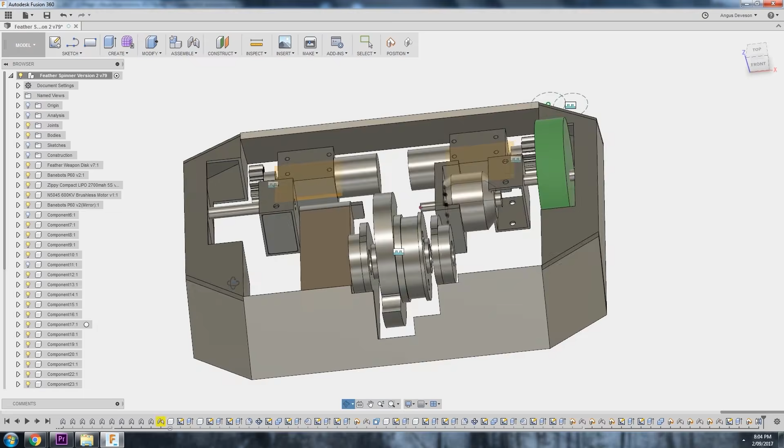I love robot combat. Back when I was 14, I first discovered it through Robot Wars that was finally aired in Australia on Channel 10, where I would watch these machines beat the living daylights out of each other in a specially designed arena, and it really got my attention because not only was it super exciting and cool, but it's something that I felt I could get into because I'm not big on sport, but I like to build and design things. So the idea of designing and building this machine that was put to the ultimate test in the arena in a 1v1 fight really appealed to me, and I'll be honest, I got pretty addicted.

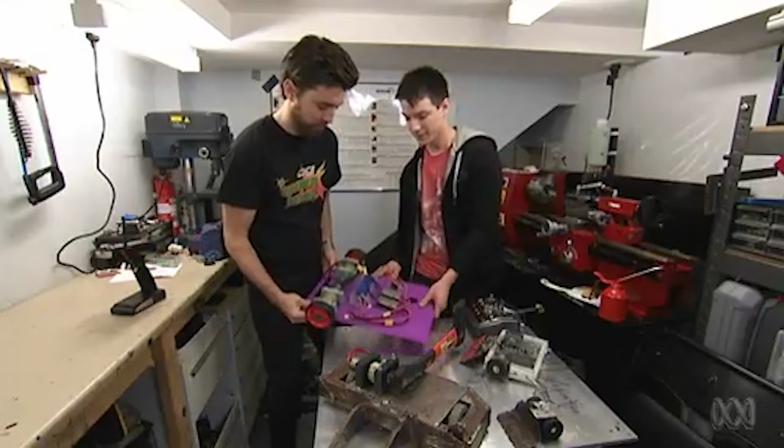For the next 4 or 5 years onward from that point, my whole life revolved around robot combat. I competed in local events, I flew interstate, I would design robots on my exam papers because I couldn't care about the class, but I wanted to build robots.

And the really neat thing about combat robotics is it's a design challenge and you learn all sorts of things. I learned 3D modeling, I learned electronics and wiring, and how to build things that could withstand incredible punishment. And it was those design skills that got me eventually into industrial design at university and proved to be an incredibly valuable foundation for where I am today.

But that was over 10 years ago, and after a while I stopped competing and started instead commentating on events, and it's been a good 5 years since I last competed in a combat robotics tournament, because there's been a few factors involved. But that all changes today. There is a combat robot event happening in Adelaide here in Australia in August, and I am determined to compete. And I'm going to take you along for the journey.

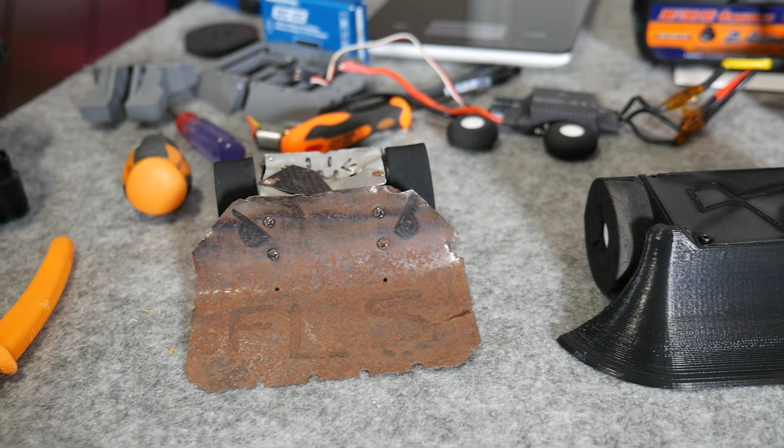There are several weight classes involved, and I'm going to be building a robot for every one, starting with this video, which is going to be walking you through how to build a fully 3D printed antweight to compete in the non-destructive antweight class. Let's get started.

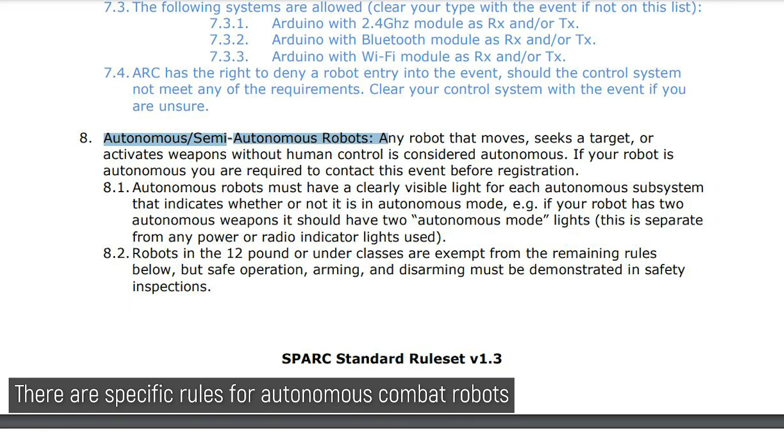Okay, so before I begin, I want to get one thing out of the way. Combat robots aren't really robots, and this upsets a lot of people that we call them robots, but the thing is, they're not autonomous. Now, there's nothing stopping you from making an autonomous killer combat robot, but for the most part, these machines are remote controlled. So think of them like a remote controlled car or remote controlled plane, but with armor and weapons, and they compete in a specially designed arena.

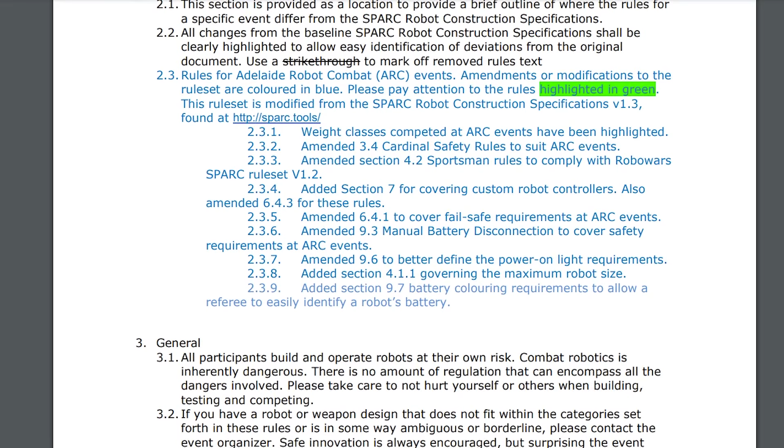But there are rules, so there's weight classes and there's rules for combat. The rounds go for 3 minutes, usually, and the idea is to incapacitate your opponent in those 3 minutes by either destroying them completely or flipping them on their side or otherwise getting them to be unable to move, then they get counted out. Now, you can't have projectiles or explosives or liquid weapons or EMP jamming weapons because A, the safety of the audience is really important, and B, something that just jams a radio so you can't control the robot isn't really that exciting, is it?

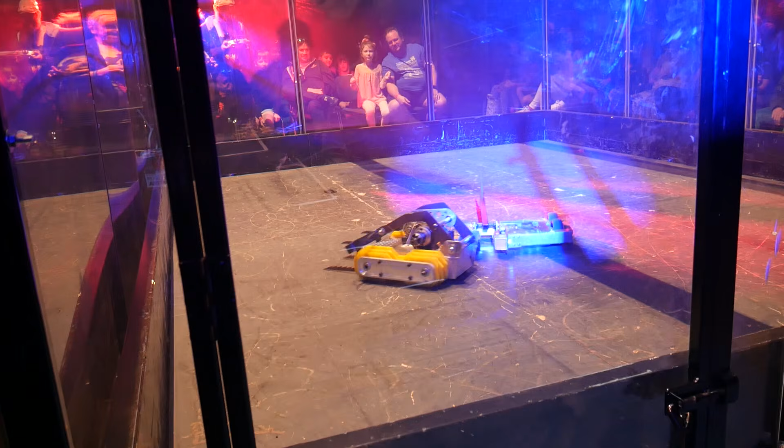So there are rules that basically make it a bit like medieval combat. You can have things that whack, slash, flip, cut, but you can't have anything that could endanger the audience or make it boring for them watching. And just like boxing, there's weight classes. So the ones you see on TV are heavyweights. These machines weigh over 100 kilos and they are massive, they're huge, they're expensive to build, and they are so incredibly dangerous now that they compete in only a few specially designed arenas around the world. And even then, BattleBots, for example, has had to put limits on weapon tip speed recently because of just how destructive these machines are. They are the big boys.

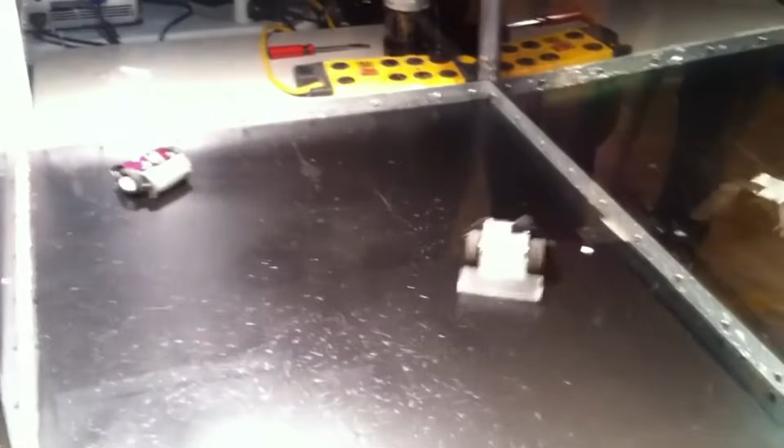These are the little boys. Right at the other end of the spectrum are antweights. These machines weigh 150 grams max. But in that weight limit, you can still have a lot of fun. These machines are easy and cheap to build, they're lightweight, you can transport them easily, and you can build them out of everyday materials.

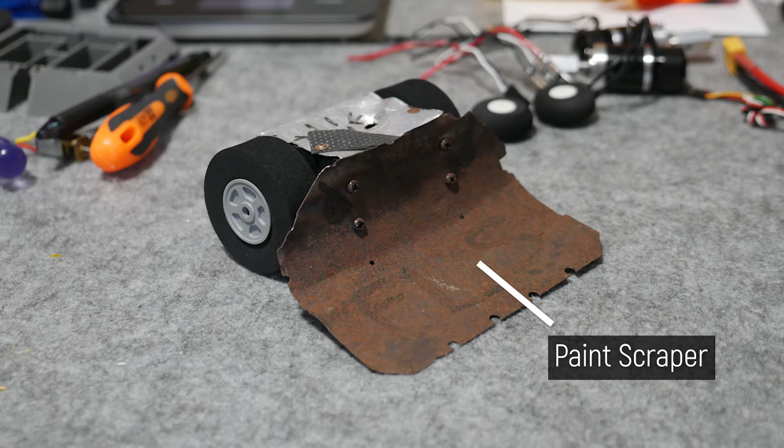Now, this is FLS, this is over 10 years old. I hung on to it because no one was able to destroy it. It's built with a paint scraper wedge with some wheels and some bits of chopping board armor on the side. I built this from scratch in my parents' basement workshop when I still lived there, and it did really well. It actually won its first event. But these days, I do a lot of 3D printing, so I want to rebuild this machine using 3D printing processes, and I'm going to release the files to you guys so you can build your own as well.

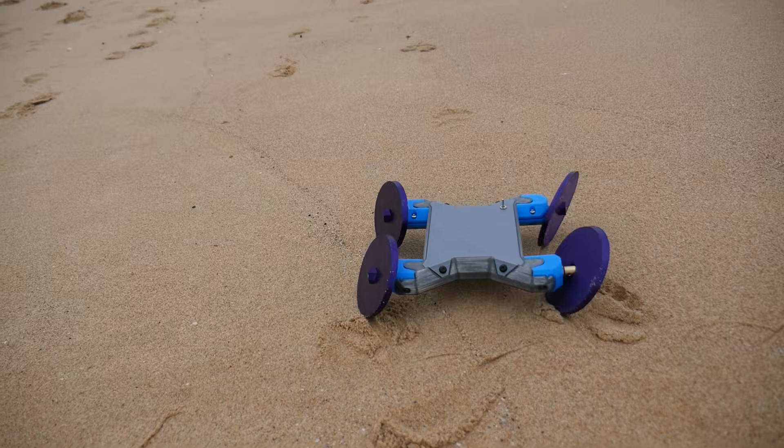But what goes into building a combat robot anyway? Well, some of you may remember last year I made this. This is one of my off-road platforms that I designed to test wacky wheels, like the wobbly wheels on that. And this is essentially the same as a basic combat robot. It uses all the same components, and it's very easy to put together once you know what's involved.

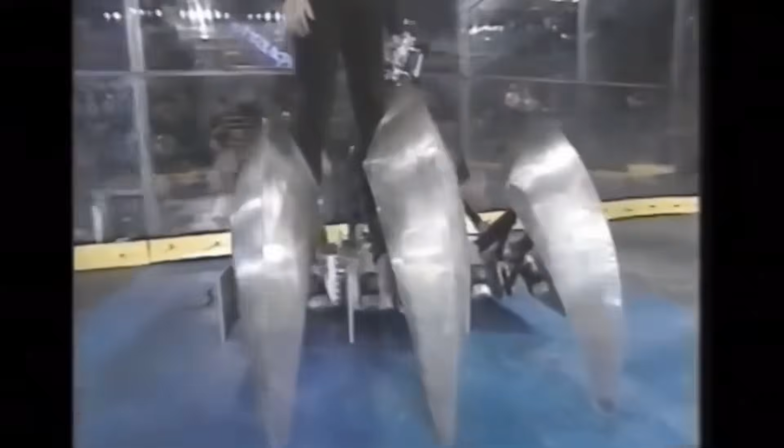It has motors, it has speed controllers, it has the receiver, and it has a battery. And those are the core components needed to get something like this moving under remote control. Let's go through each of those components individually. These are gear motors, and you need them for your machine to move. Without them, it's just going to be sitting there unless you figure out some sort of crazy walking mechanism, but yeah. I would start with motors, and there is a huge range to choose from.

I usually look on eBay to find low-cost gear motors that I can use for my robots, but you can go all the way to custom-designed, specially made combat robot gear motors that are hardened, which means they're much more durable, and everything in between. So for example, here I have these little 1000 RPM gear motors from eBay. They're rated for 12 volts, which is a good voltage to go for combat robotics using a 3-cell lithium battery.

Now the really cool thing about combat robotics is even within the rule set, there's a huge scope to make it your own. As long as you're within the weight limit and you're not violating the rules, you can really do what you like. And choosing your gear motor is a good example of that. You can choose a really small gear motor, which might be lower power, but give you more weight for a bigger weapon or more armor, or you might choose a much larger, more powerful gear motor, but that's heavier and therefore it's going to need a bigger battery, use more current, and take up more of your weight limit. And it's all this sort of balance of finding the best for your design and working with that.

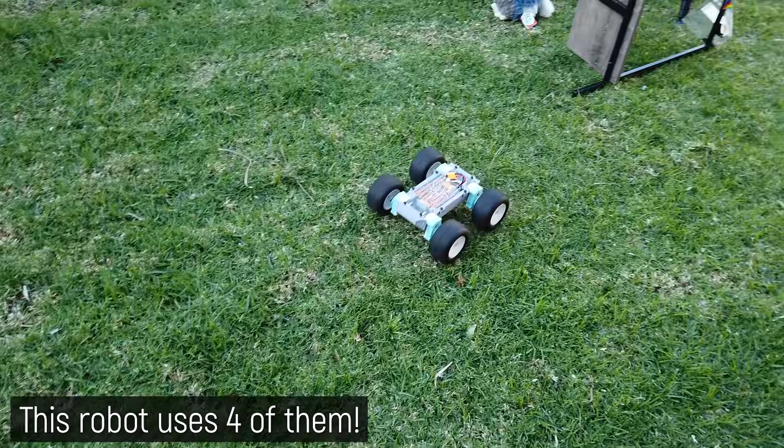Now in terms of the output RPM, I would say you want to go for something between 500 and 1000 RPM in terms of the output speed. And you want something that's not too small. For antweights, you can use these really tiny little gear motors, but I also really like these ones. And if you want to go super hardcore, these ones are great for beetle weights and even a little bit larger. They're very expensive, but these are very, very durable and very high power. So there's all sorts of things in between. I just recommend starting on AliExpress or eBay.

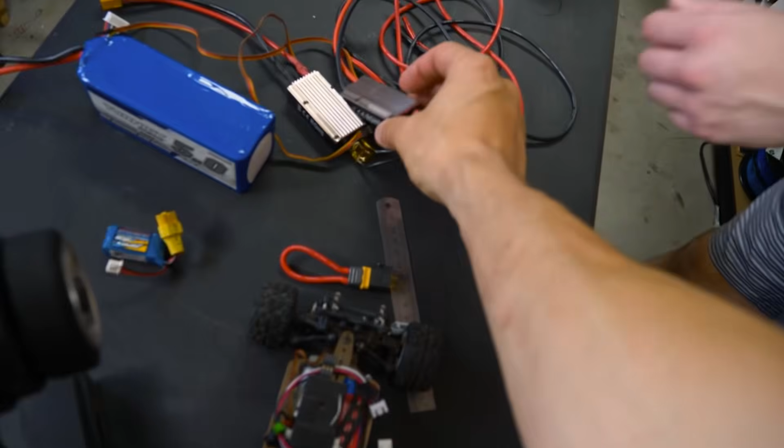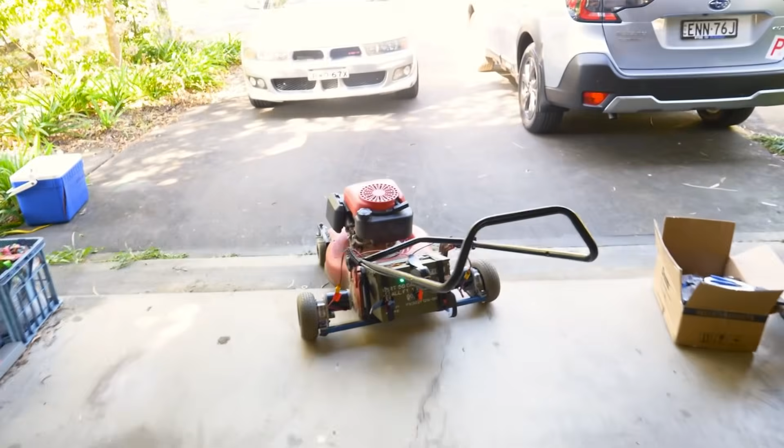This is a 2-in-1 speed controller that I picked up from FlipSky. This is what I'm going to be using for my build, and it controls 2 different motors using 2 inputs from your receiver. Speed controllers come in all shapes and sizes, and you want to choose one that's suitable for your motor. They can be tiny like this, in which case they're suitable for a small little motor, or they can be massive like these guys, which I used on the remote control lawnmower build I did with I Did a Thing. So these guys are really large and they're rated for 85 amps. And I use them to control those wheelchair motors on that build.

Usually when you buy your gear motor, the listing will show on the datasheet the stall current for that motor at the rated voltage, and that's a good way to size your speed controller. If you go too small, you might blow up your speed controller, and if you go too large, well, you're wasting space. I'm not going to be putting this into my antweight, which only can weigh 150 grams, am I? I'm going to be trying to size it for something like this. So for my build, I'm going to be using the FlipSky speed controller because, again, they're cheap and they are a 2-in-1 deal, so I don't need a single controller for each motor, which adds wiring complexity.

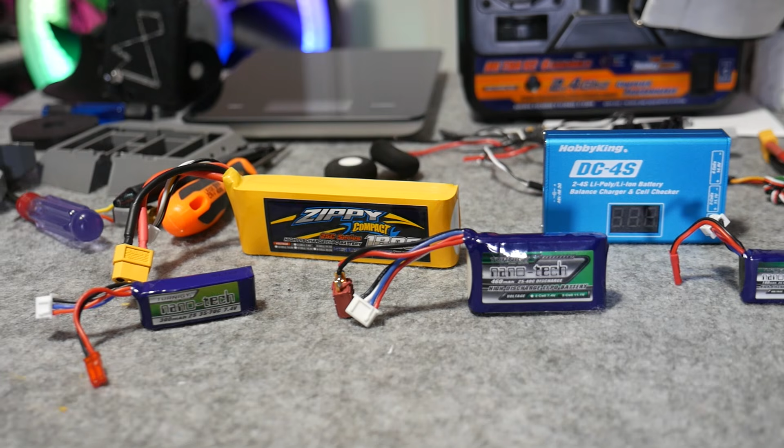I can just use the 2-in-1. Next up, you need a way to power your robot platform, and for that, you need a battery. So these are lithium polymer batteries. They've become incredibly easy and accessible to get now because of the advent of all sorts of remote control aeroplanes and things. That's what these ones are specifically designed for.

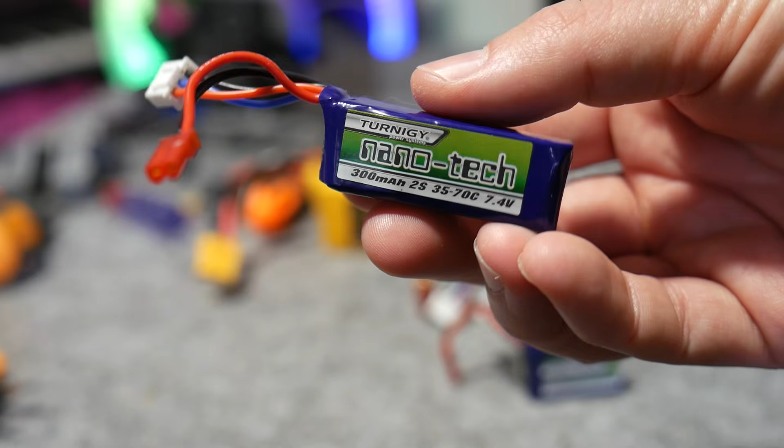And they come in all shapes and sizes, from little tiny ones to much larger ones to massive ones that have a ton of capacity. So when I say capacity, how do you measure how much capacity a battery has? Well, it's measured in amp hours, and these batteries are rated for milliamp hours because they're usually much smaller than 1 amp hour. So this little battery here, 300 milliamp hour, that is more than enough for an antweight robot. Remember, they only have to run for 3 minutes at a time.

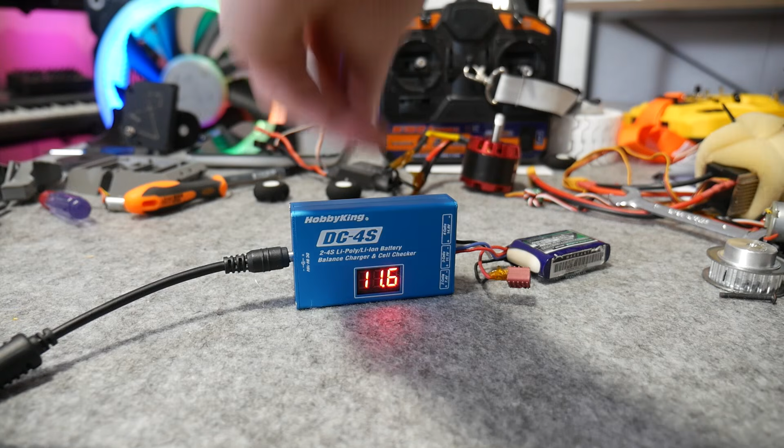And unless you have a very high-powered drive system or weapon, then 300 is more than enough for an antweight. To charge this, I recommend the low-cost chargers that simply plug into this balance lead, and then they charge it over a period of time. Now, I do need to say, with lithium polymer batteries, they can catch fire. There is an inherent safety risk with them because of the lithium inside. When they do catch fire, you can't really put them out.

So to use them safely, you need to make sure they are fully well enclosed and cannot be damaged. So they are actually soft. They're not hard. There's no hard case. So you need to be responsible for making a hard case around them to protect them. When you draw too much current out of these or you discharge them too much, they can become what's known as puffy, where they actually will puff up from gas inside the cells as they deteriorate.

When a battery goes puffy, it's bad. You need to replace it and throw it away. And there are very specific ways to safely dispose of lithium polymer batteries.

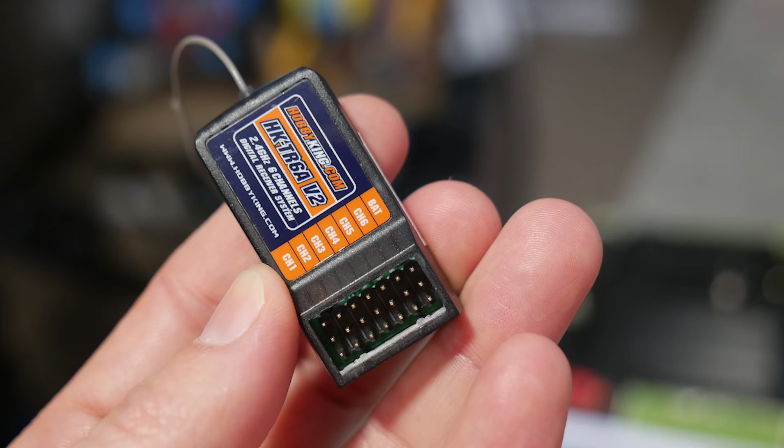So for example, for a remote control aeroplane, you might use this for throttle, ailerons, I'm not exactly too sure on the terminology, but you have 6 different inputs to choose from. But if you have a transmitter suitable for a remote control car, it may only have 2 channels, which again is suitable for a robot like this with only drive, but you have no way to control a weapon.

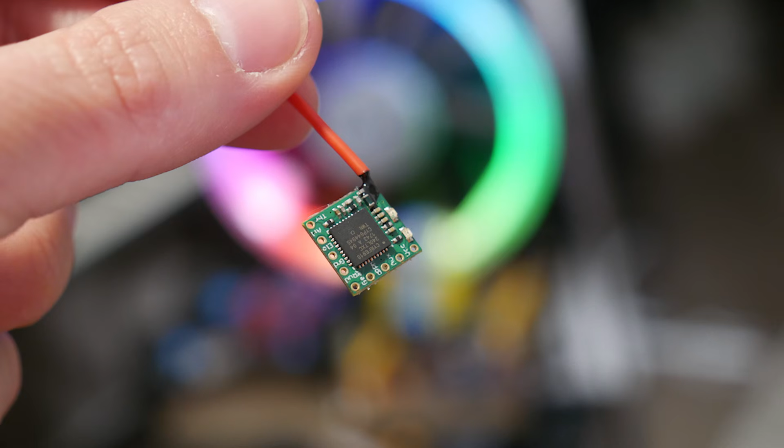And when you're building antweights, size and weight again is very important. So although this is a 6-channel receiver, this is also a 6-channel receiver. And yeah, they both do the same thing, but this is microscopic in comparison. Much harder to wire in, but it does exactly the same job. So when you're choosing what you need, keep in mind the size of the receiver and how many channels you need for your machine.

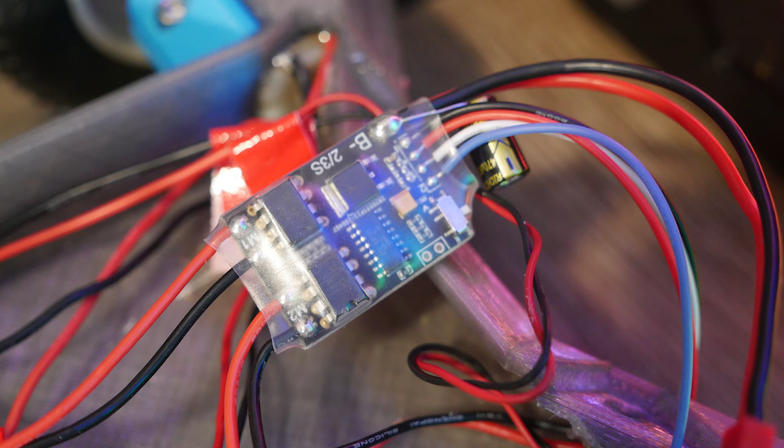And then there's also things to consider like mixing. So for example, these drive like tanks. It's called differential steering, where both wheels go forwards with the 2 motors working together, but to turn, they actually go in opposite directions. So that means to control this properly, you need to mix those inputs, and it's known as V-tail mixing or tank mixing. So many transmitters will actually offer it because it's used in some aeroplanes, but also the 2-in-1 speed controllers like this one from FlipSky actually offer V-mix built into it, so the transmitter doesn't even need to do it because this thing can do it for you.

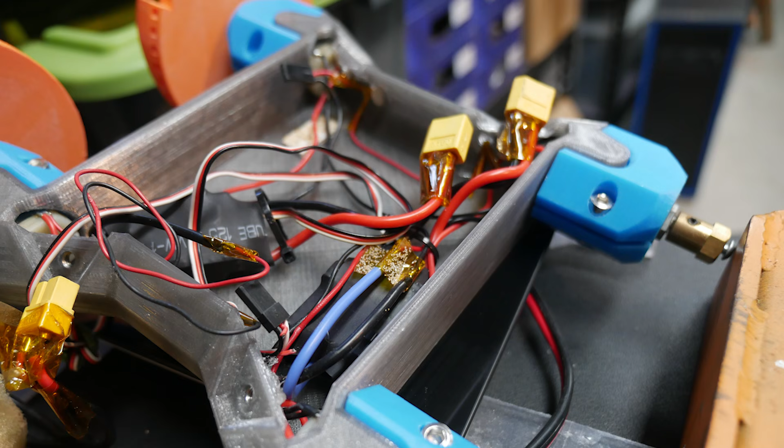And you can also buy separate modules that plug in between your speed controllers and receiver to do that mixing. But keep that in mind, because your robot has tank style steering, you need mixing somewhere in the mix to make it all controllable. And really, that's the core of what you need to build your combat robot.

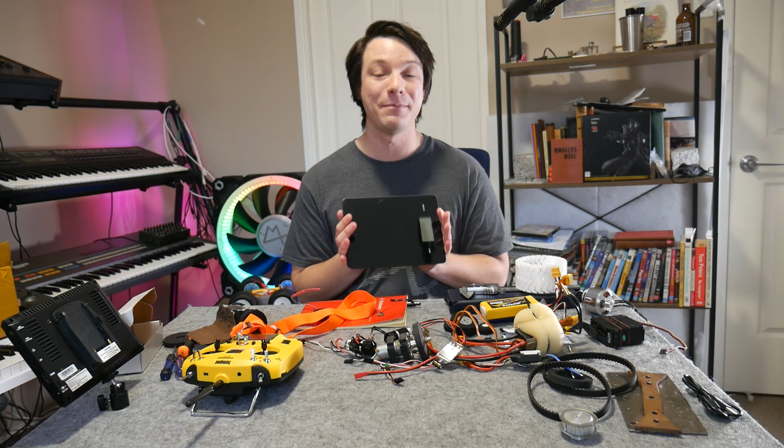Now, there are other things like your plugs. You need a switch of some kind to turn it safely off and on. And also, I recommend a scale. This is just a kitchen scale. This is great for all the insect class robots like the antweights and beetleweights, because again, you need to make weight. It can't be overweight. It's like boxing. You cannot compete unless you're within the weight class. So I use these scales all the time to weigh up components and get an idea of how heavy the robot is before I then take it off to compete.

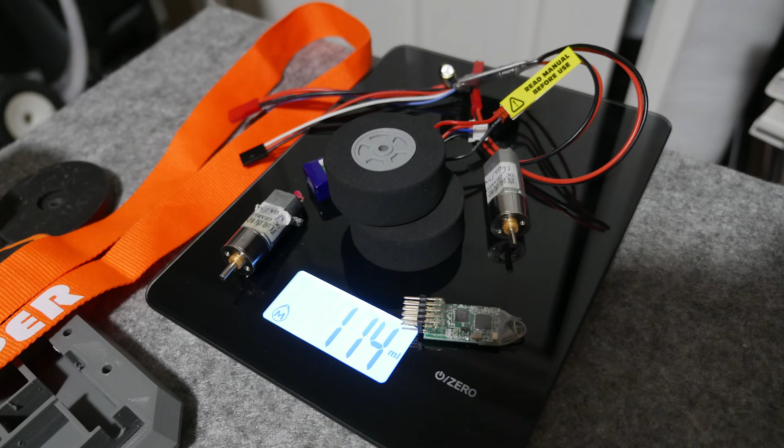So I think it's about time we design up a version 2 of this little wedge robot so I can then start drawing it up in Fusion 360. Before I do anything in CAD, I always start with a sketch. And what I really like to do, and it's really practical, is just to get your components and sketch them out on a piece of grid paper. This really gives you a real world idea of what shape and size your combat robot should be, and just where the parts can be in space.

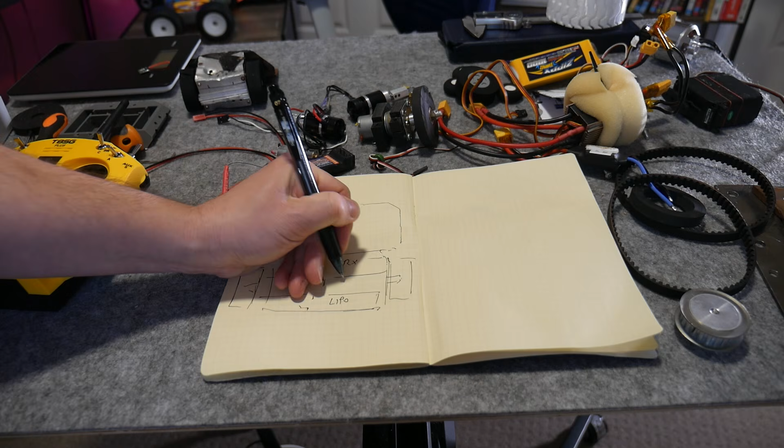And as I said, I used to draw this sort of thing all over on my exams and just when I was bored to get an idea of how to arrange these parts and Tetris them in such a way that I could build the most compact design possible. And this is really the best way before you get into CAD, because if you start with CAD, you'll limit yourself. But if you start with pen and paper, you'll come up with some really cool ideas that you can then translate into 3D design and then create really cool robot concepts out of them.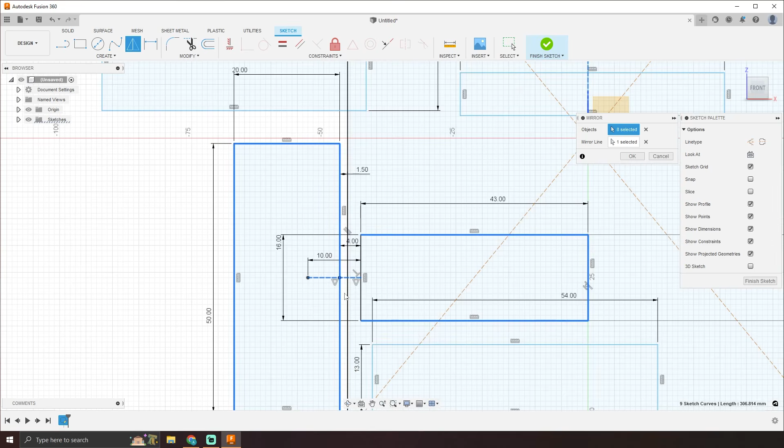And it's only after I've done some designs on pen and paper that I finally come into Fusion 360, and to get an idea of where the components are in space, again, I do a single sketch, where I'll measure my components with calipers, make sure they're precise, and then bring it into a single sketch to get an idea of where they might sit before sketching anything more complex in 3D. Because again, it's really easy to lose yourself in 3D space and then design something that's too small or where the parts won't fit. But by designing in this order, I feel you're much more likely to end up with a design where the parts actually fit together and your final print isn't going to be too small, and then you'll have to go back to the drawing board.

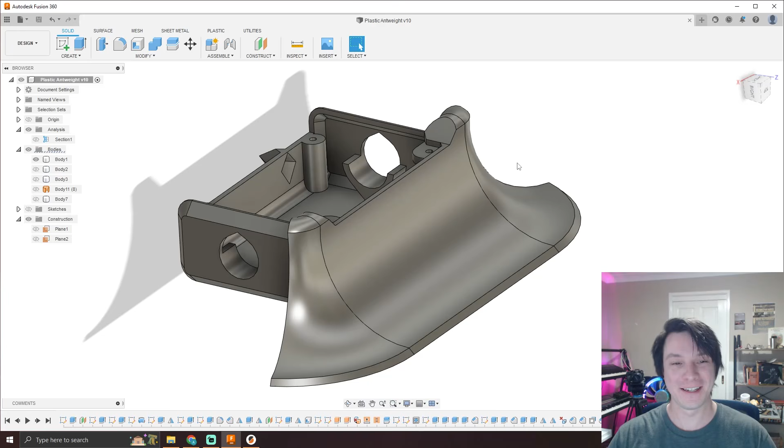Okay, I got a little bit carried away. As usual, it's now nighttime.

So I'll just walk you through a few of the design approaches I use, starting with the shelling approach. So let me just hide the top body here. What I've done is I designed it solid, and then I used the shell command to hollow it out. And what's really neat about that is if I go back to the shell, I can change the amount, and that can be changed to make it lighter and suit a more detailed printing process like SLS or MJF, I think it's called, multi-jet fusion, where you can get away with like a 1.5 millimeter thick wall. But with FDM, I'm probably going to go with 2.

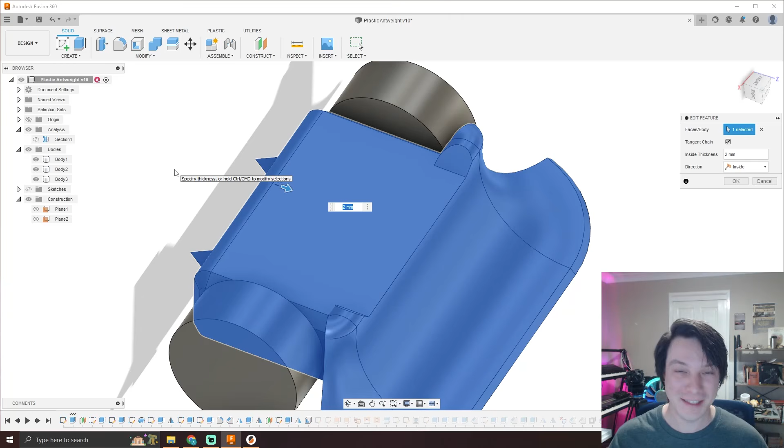But let's say I want it to be even thicker, I could say like 3. And I can update that as follows. And then my whole timeline updates with a thicker wall like that, but I'm happy with 2. I think that'll print fine.

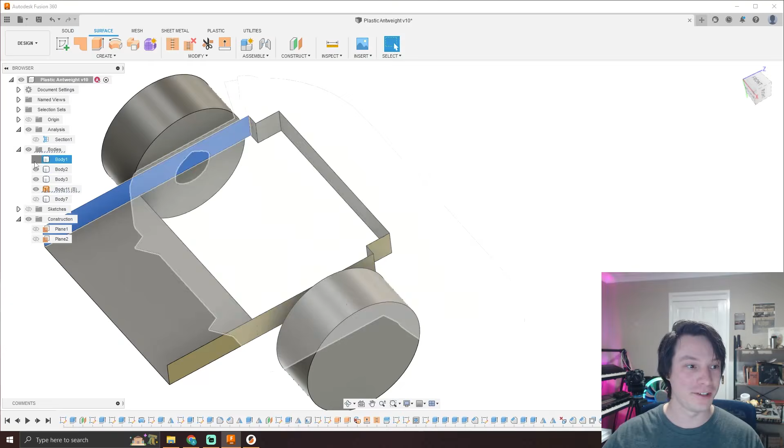And obviously you need to get into the robot, so I've got this top panel here. And to make that top, I use this surface body. So I use the surface workflow to draw this body, which then I use to cut into that shelled shape to remove the top section to make it a separate part that then I could use as the lid. It's got some details for screws to hold it in place, a little hole for the LED, and my logo. It's interesting to see just the tops of those spikes because it happened to intersect with them there. And I can change that if I like, but it's actually looking pretty cool to me.

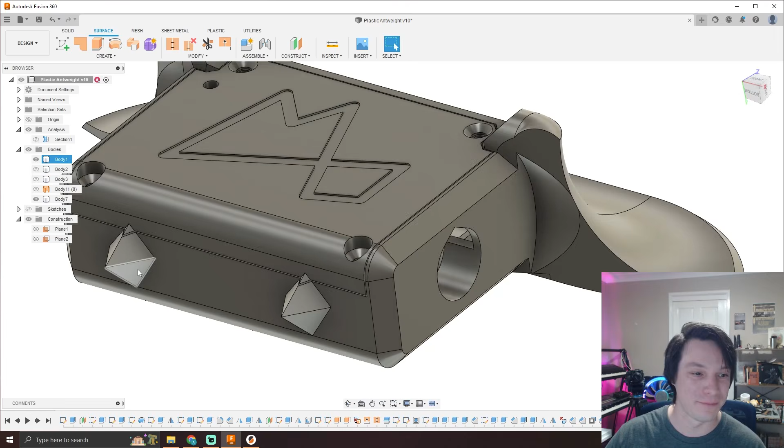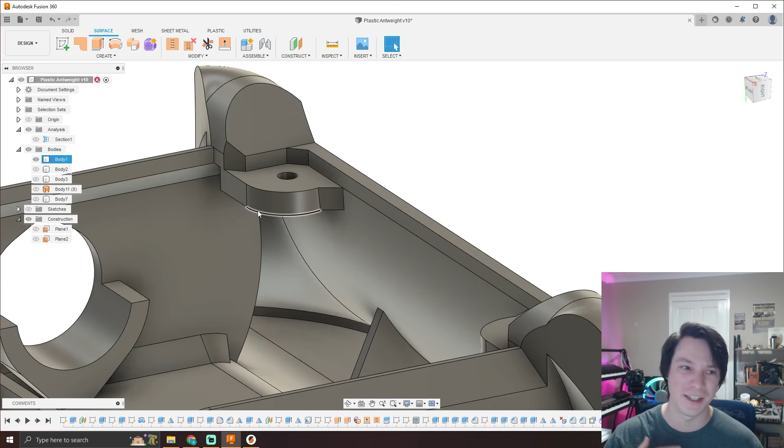The only issue is some areas will need a lot of support material. Namely, if you look on the side, the bottom area will need support. And also this area here, where I am allowing for that top to be screwed into place, needs support. Now I could go through and design some angles and chamfers and all sorts of features to bridge and whatever, but it's fine. I'll just send that with support material because I can easily access it. I can pull off the bottom and pull off those areas, and then I can put it together.

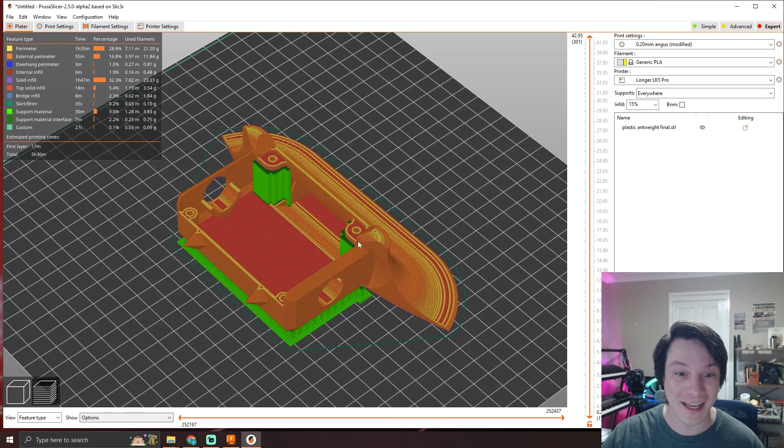So let's export this and then open it up in PrusaSlicer. I almost forgot this, so I just switched to the latest alpha PrusaSlicer 2.5. I can't keep up. But the reason I've done that is because there's this new setting which is called Arachne. I don't know how you pronounce it, but it can change the extrusion width intelligently to avoid doing those little small fills that usually jump around and take ages and don't look that great on the print. So I've just switched across to that.

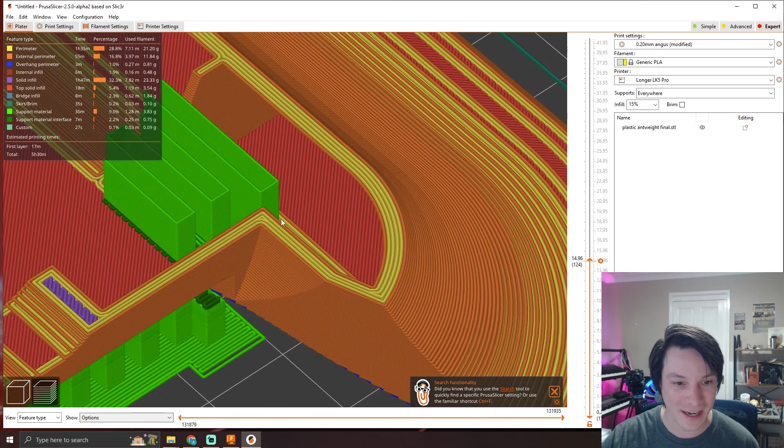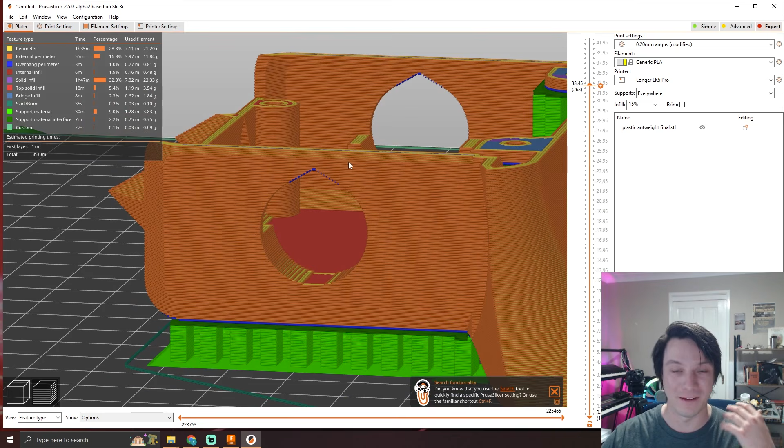It hasn't changed the print time too much, but if you zoom in, you can see how the lines actually intelligently change width to perfectly fill out the different wall thicknesses of the print. It's really neat. So yeah, here's the idea. It builds up, got the big scoop, comes up, builds the motor mounts, and comes all the way up. I've got a little bit of allowance for the top of the holes to droop down because in my video ages ago about printing accurate holes, this is a good little trick to do like a teardrop. Then it comes all the way up like that, and it's good to go. So let's send it to the printer.

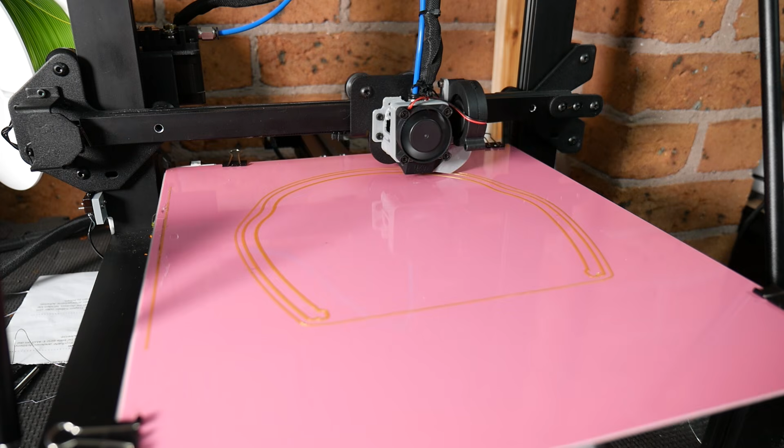And here it is. This is the first test of the plastic antweight frame. It came out pretty good. It's on the Longer LK5 Pro that I've heavily modified with a G10 print surface and lots of other tweaks. But then that takes us to the next stage. How do you wire in all of these pieces together so you get a working combat robot? Let me show you the wiring diagram.

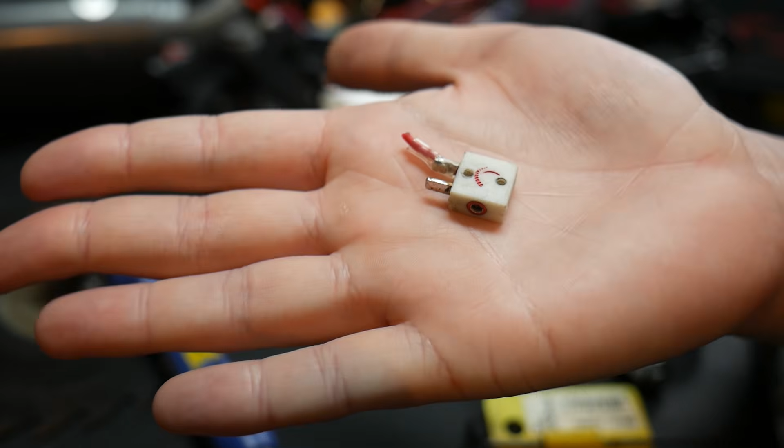And then finally, you need a switch. This is really critical, because you need to turn your robot off and on again. There's different types of switches you can use. You can buy special battle-hardened switches that use an Allen key. I highly recommend getting one of those if you can, because they're really safe and easy to turn on and off, yet they're very durable. They won't turn off during combat.

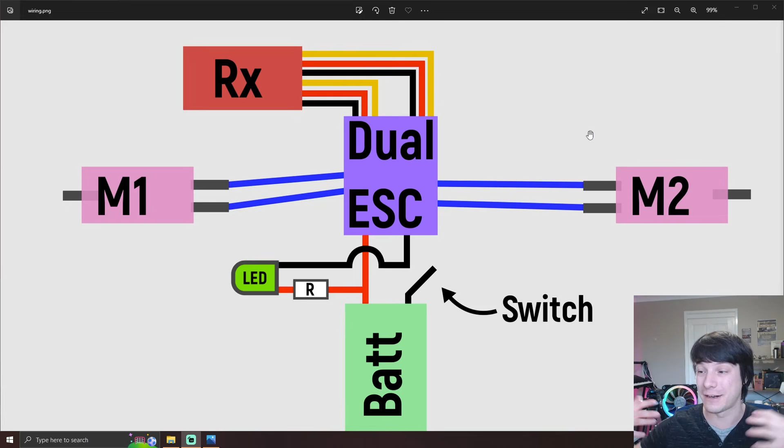And yeah, that's essentially it. This is the core for every combat robot out there. You just will start to tack on things like weapon motors, weapon speed controllers, different battery systems, and more stuff like that. But if you can master this, you're well on your way to learning how to build combat robots, or any remote control platform for that matter.

There is one final thing I need to talk about before I move on to wiring my robot, and that is your BEC, or battery eliminator circuit. The reason I didn't show it in my wiring diagram is because my speed controller has it built in. So what a BEC is, it allows your receiver, like this, to receive usually 5 volts to be powered. And obviously your battery isn't usually going to be 5 volts. Like my lithium battery is 7.4, it might be even higher. And you need something called a BEC to regulate that down to a safe 5 volts so this can get power.

Now, as I said, this speed controller actually has a built-in BEC, but it's not powerful enough to run external systems that might be current hungry, like a servo motor or something like that. It's only powerful enough to run the receiver. So if you want to have some kind of servo motors or larger current hungry components attached to that BEC output, that 5 volt output, you may need a dedicated BEC that has a larger amount of current capacity to then run those systems.

Now it comes to the most fiddly part of all, assembling and finishing your little combat robot. Now, there is no hack for this. It is tedious and fiddly to put together these little robots. You need to be quite confident with your wiring and quite decent at soldering. I can't teach you how to solder in a short video tutorial, unfortunately, but practice makes perfect.

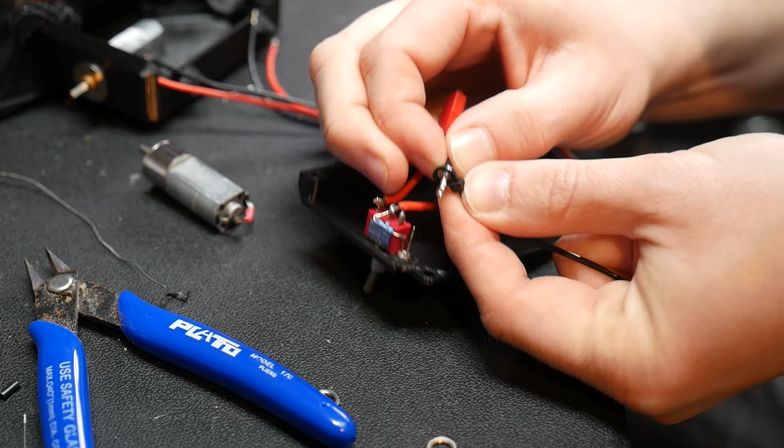So what I like to do is just try to shovel the parts in as tightly as possible and get an idea and feel for where they'll sit. And you'll see already that wires take so much space up, way more than you'd ever expect. By far, the most fiddly part of this build is the switch and LED, because this needs to not only turn on the robot's power, but also give power to the LED light. And if you don't have this, then as I mentioned before, it's a safety hazard and you're probably not going to be allowed to compete.

You must have a safety switch and an LED, but it does mean you need to do some pretty fiddly wiring. So I have this little trick, this little hack that I use to combine 2 wires into one, which you do need to do if you need to split power off between 2 different systems. I like to use a little zip tie to hold the tinned ends together of that wire, which gives you a little bit more freedom to hold them in place with another hand and then solder them into position.

Without this, you're kind of holding 3 things at once as well as a soldering iron, and it's kind of impossible. But by using the zip tie, you can manipulate them as one, and I do really find it helps you get them to position, because again, it can be really fiddly soldering together these components.

And then at this stage, it's a great idea to do a test run where you plug the receiver in and get an idea of which direction the motors will spin. Even after doing this for so long, I never get it right first go. It always takes a few tries to figure out what channel I'm using and which direction the motor should spin.

So I highly recommend doing this while the machine is open and easy to access, so you can perhaps swap the wires on one of the motors or easily swap the channels on the receiver to make sure the robot is moving in the right direction before you button the whole thing up.

Because this robot's so small, I opted to use hot glue to secure the gear motors in place. It's not the most elegant solution, sure. I could have done a little faceplate with tiny little screws, but because they're just so small, it made more sense to me to use a little bit of hot glue and then hold them in place like that, and there's nothing wrong with that.

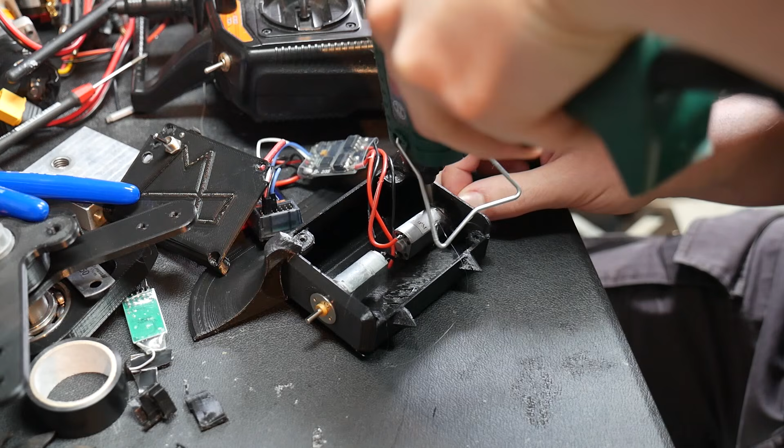Because yeah, it's highly unlikely it's going to be perfect off the 3D printer first go. You're going to need to do some modifications, drill a few new holes, file a few areas, and with that, I carefully jam the guts in and secure the top lid in place with 4 screws, and our little 3D printed antweight is complete.

And here he is. This is my fully 3D printed combat robot antweight.

And yes, I got a haircut. Who needs continuity anyway?

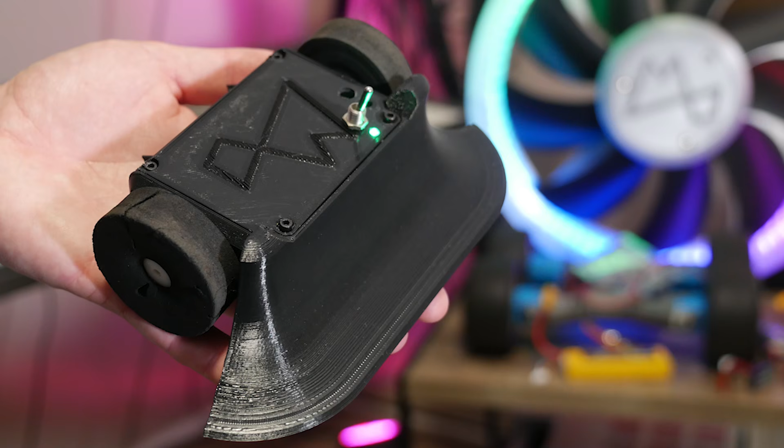So for the most part, I'm really happy with this design, but there's a few issues that need to be remedied. Number one, it's overweight. Now, remember I mentioned using a set of kitchen scales is critical for getting these robots within the weight class, because if you're overweight, you can't compete. Well, this is about 30 grams over the weight limit. It's about 180 grams when it needs to be 150.

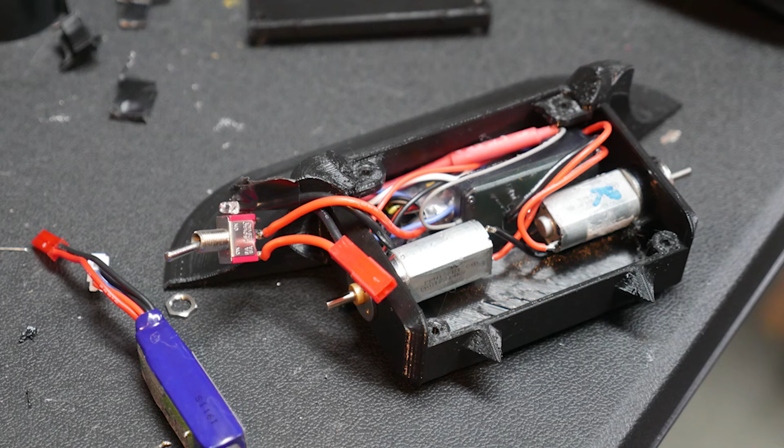That's mostly because 3D printing is a lot heavier than I expected, and it also is due to the very heavy gear motors that I've chosen. The previous version had these much smaller gear motors that are a lot lighter. These ones are more powerful, but a lot heavier. So I think to make this under the limit, I'd either have to make the frame a lot lighter, which is definitely possible, or go to the smaller gear motors.

But again, I'm going to leave that in your court because it's your design and you can adjust it and work with it as you like. If you're not planning to actually properly compete, you should still build it as is, because it's really a great learning experience for how these machines go together. And if you have two of them, they'll be equally matched anyway.

And I also ended up going with this little toggle switch at the top. You can see that really bright green LED looks really good there. I had to move the position, hacking it as I'm going, because the switch is quite large inside and those wires take up so much space, I always forget.

But I actually quite like the idea of the switch being vulnerable, because if two of the same were fighting, then that switch, it's off. So I kind of like the idea of them competing and trying to defend that switch. I didn't end up using the combat robot switch with the Allen key that turns them off and on, but I'll use that for my next version that I'll actually compete with, because I need to make it, again, go on a diet.

And one final thing I need to address is that the speed controller I've chosen from FlipSky doesn't have braking. It's not a huge issue, but it does mean this is a little bit harder to control than some of the other speed controllers like the ones from BotBits that I've used in my previous antweights, because when you turn and release the stick, those speed controllers brake. They'll try to stop the motor. This current speed controller doesn't.